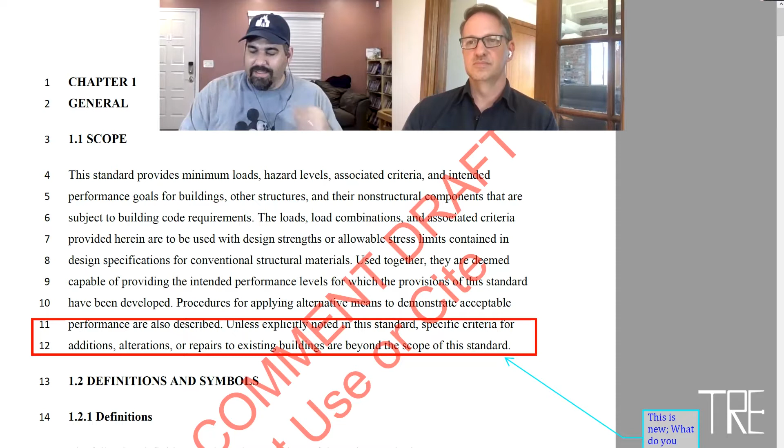And this has never been mentioned prior in the code. Most of the documents you'll look at have the alterations underlined and crossed out. The first few chapters I was looking at the document without the edits. So yes, this is a new set of language, and it took me by surprise. So that will be duly noted as a comment when I submit. Well, I would go further to ask, what brought this up? When you guys were having meetings, who raised their hand and objected, and everybody said yeah?

Yeah, and I think the intent, if I had to guess, and I could read the commentary, is that they don't want to make a blanket statement that this is good for existing buildings. But, hmm, I guess if you're referenced to the code from the adopted building code, then I guess it's okay.

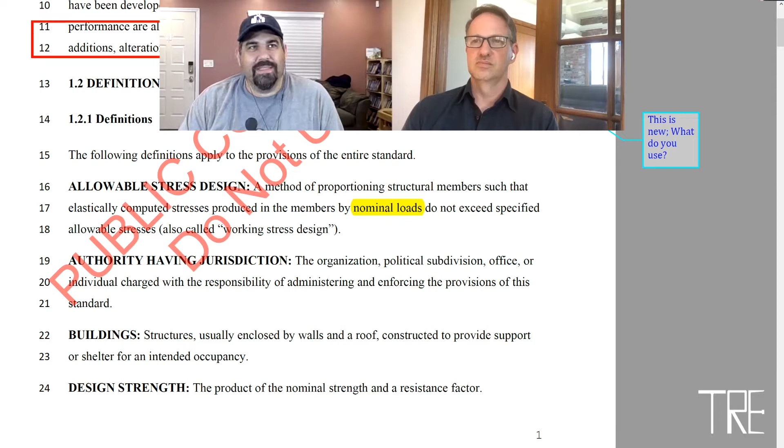So you can see highlighted in yellow the word nominal, right, and this still causes problems. Here it is for allowable stress design, and it's saying that you're supposed to use nominal loads, and you and I have talked about this at least twice on air. No, no, no. And here we have nominal sprinkled throughout the code, and under factored loads, that one should be correct. That is correct.

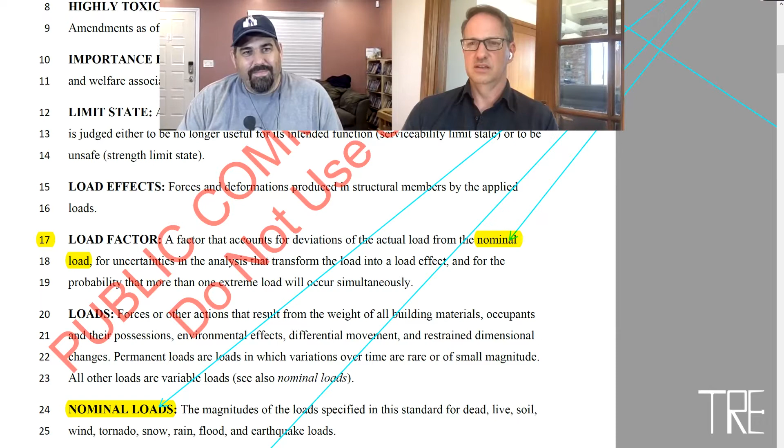And then we come down to load factors. Again, the correct use of nominal. Right. And here, nominal loads are the magnitudes of the loads specified in this standard, which is the correct usage. So those few lines there understand what it is, but then going up to line 17 there, they don't understand what it is. It's not consistent.

The principle of exceeding a nominal load doesn't make sense. It's like you don't exceed it until it's been factored. Right. And so consistency is all we ask for with that, and correcting the use of nominal. You'll see highlighted tornado loads. Like I said, it's a new chapter, and it's something we've got to consider.

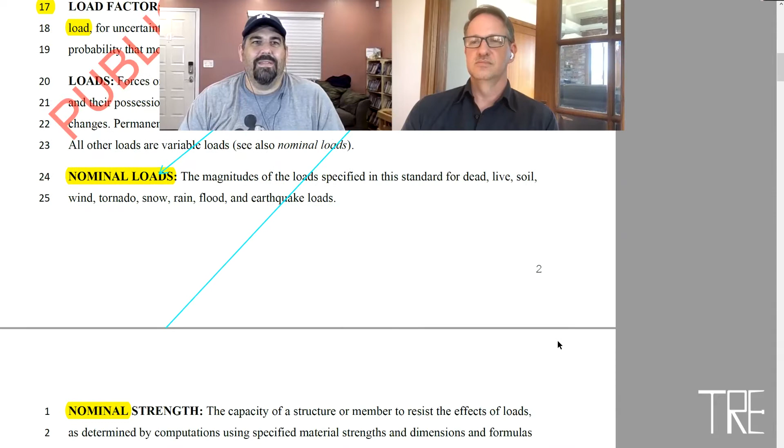Here's another nominal. They got the nominal strength is correct, right? It's the virgin strength of a material, and you factor it up or down. So we're seeing that it's just not consistent, but it is what it is for now, and I will again be commenting on it.

This one I saw in ASCE 7-16. Under the definition for service loads, it provides a statement of what you're supposed to do with service loads, that you have to identify each serviceability state and investigate it. And I'm pretty sure that the definitions is the wrong place to put a provision of action, because I would never find my responsibility to do that without reading the definition.

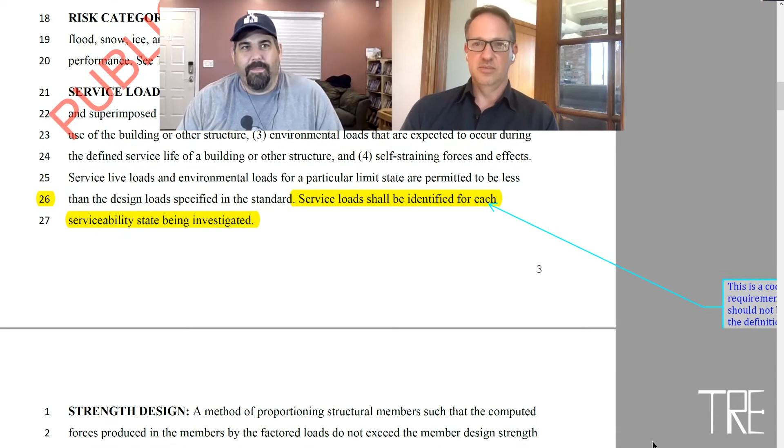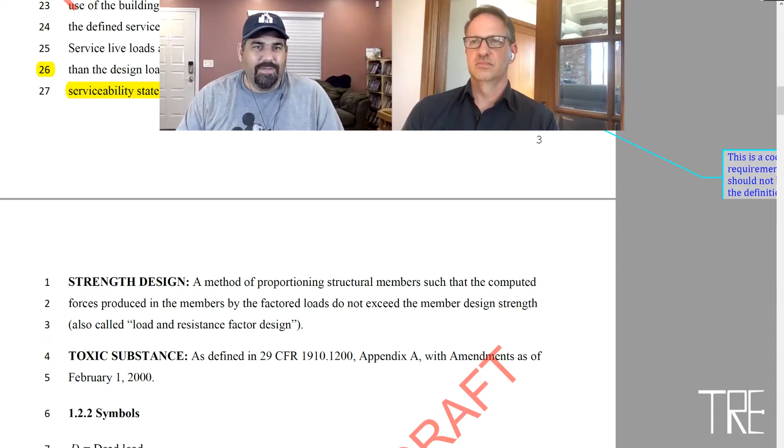Good point. That should be in the action areas and subsequent chapters, not chapter one, not hidden in a definition where you may or may not see it. I think in general we understand that we look for the worst possible combination of naturally occurring loads, but if it's something I have to do and it needs to be codified, then we need to have it in the action area.

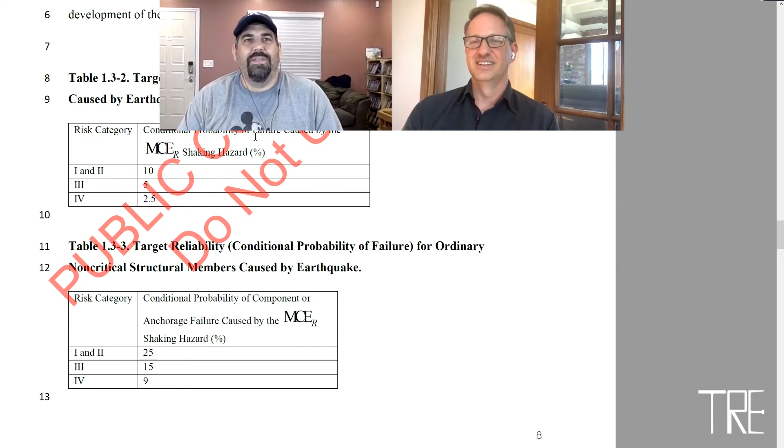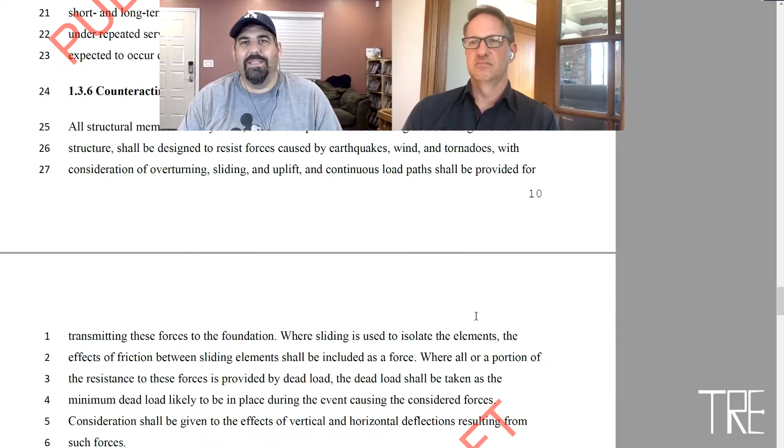Here's a fun inconsistency. We're talking about load paths, and it tells us we have to form a continuous lateral resisting system, with no mention that we have to have a continuous vertical load resisting system. Is that just because we all know that gravity exists all the time? That's the one we don't mess up? Sure. Am I being too pedantic about this?

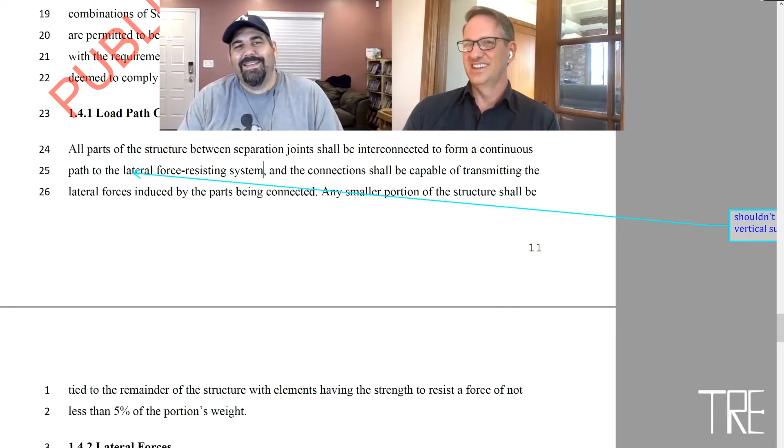No, because it's possible to create connections and conditions where something is connected until it's loaded, and then suddenly it's not connected. Something that's kind of levery, for example, something that might be cantilevered. It's intuitive to resolve vertical discontinuities, and it's harder to miss them than it is a lateral system.

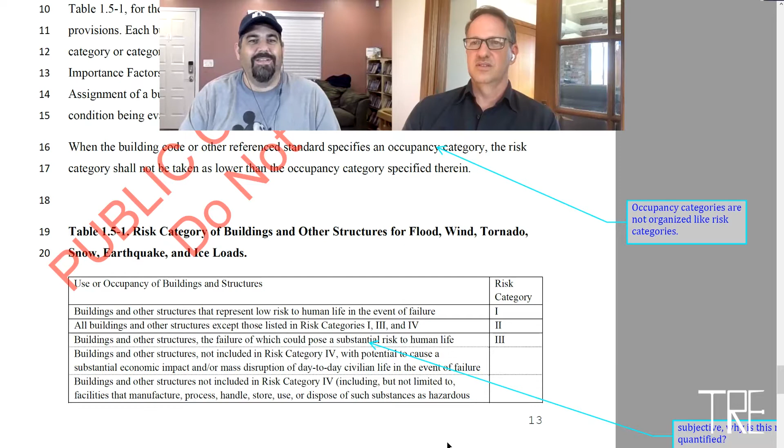But I feel like the legal document that lays out what you're supposed to do should not make a judgment about something that you're going to forget or not. Right. And it's so simple to say vertical and lateral. And the industry accepts that; that's even how the SE exam works. There's a vertical and a lateral. Yes.

And then we've had this. This is the biggest gripe I think we've ever had, and that's what is risk category 3 buildings? What's risk category 2? From an engineering standpoint, it gets conflated with the building code and how the architects define occupancy, which is based on fire and egress. They're saying when the building code or other reference standards specifies an occupancy category, the risk category shall be taken to be equal to, like, it can't be less than what's specified in the building code.

But our risk categories are not the same language as occupancy categories. So how is one occupancy greater than one risk? I don't know. And so, again, give me the Rosetta Stone that translates between architectural occupancy and structural risk category. That's what I want to know.

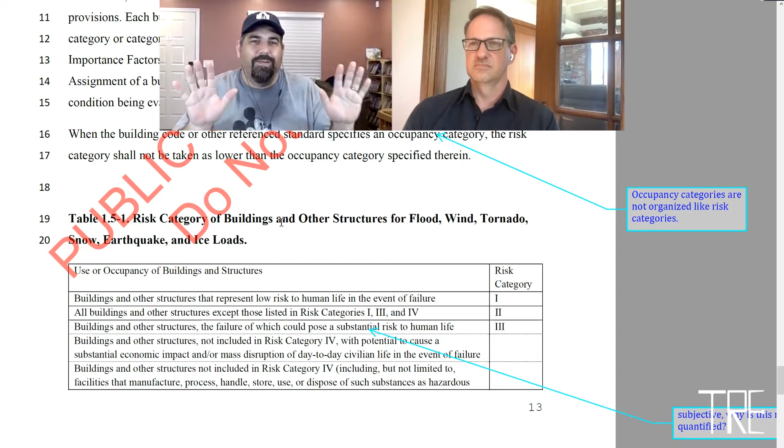And it's not defined. And then I love this generic subjective statement about a risk category 3 as something that represents a substantial risk to human life. Yeah, substantial. But it doesn't quantify what is substantial. And I think you and I have definitely discussed some formula of how many individuals, how many souls are at peril for a given element.

So if you're in a simple small building where there's a shear wall on each side, all of the occupants in that building rely on each of those 4 shear walls. But if you're in a warehouse that's 500,000 square feet that has multiple braced frame systems, expansion joints between bays, well, that one braced frame doesn't present peril to the entire structure, just to that one bay.

And also a warehouse with 100 people in it, even though it's 500,000 square feet, is much less risk than a single building with the equivalent amount of people in it that has no redundancy because it only has one lateral system in each direction. No, and we noticed this with the last code change, is that suddenly the failure of any element constitutes a risk to everybody in the structure.

Right. And you should be able to look at girders and joists and beams and do the same analysis of how many people are at peril if that one element goes. Rather than an entire building being a risk category, this gets it more into a resilience and reliability matrix of the structure. You're looking at each element and assigning its risk based on its potential to do harm.

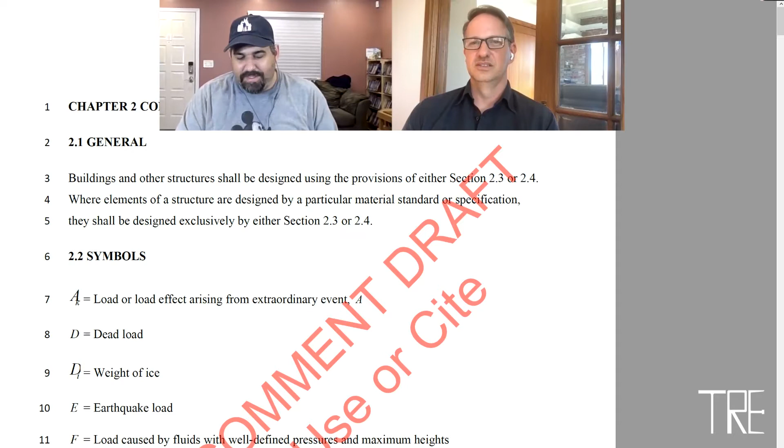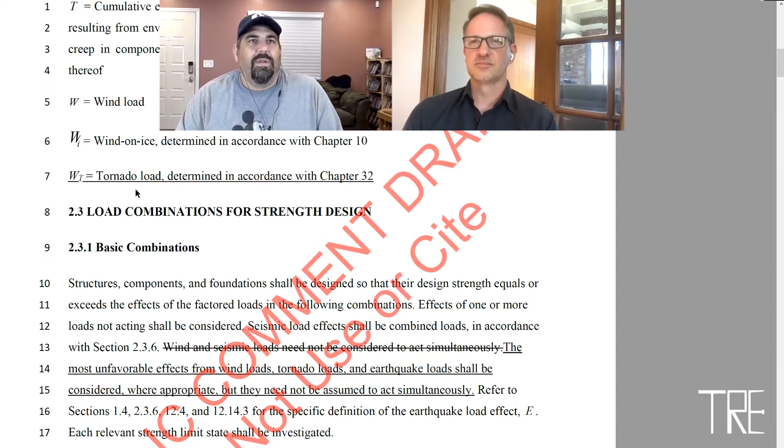Yeah. So chapter 2, we're getting into our load combinations. And there were some interesting things in here that put me off a little bit. So you can see we've added some new terms for basic load cases. And one of those is a wind tornado. Again, complementary to chapter 32.

So I moved from the West Coast to the East Coast before ASCE 7-16 was really adopted. And I know there were some changes in the seismic code, but I haven't really been affected by them. And so this is even more clarification, or more in that same vein. And so they broke out the seismic load combinations in the last version of ASCE 7, which I feel like you should break out wind if you're going to break out seismic, but I can live with that.

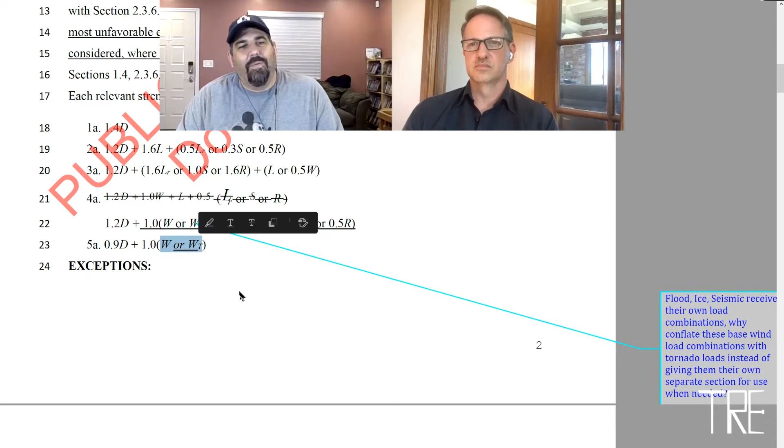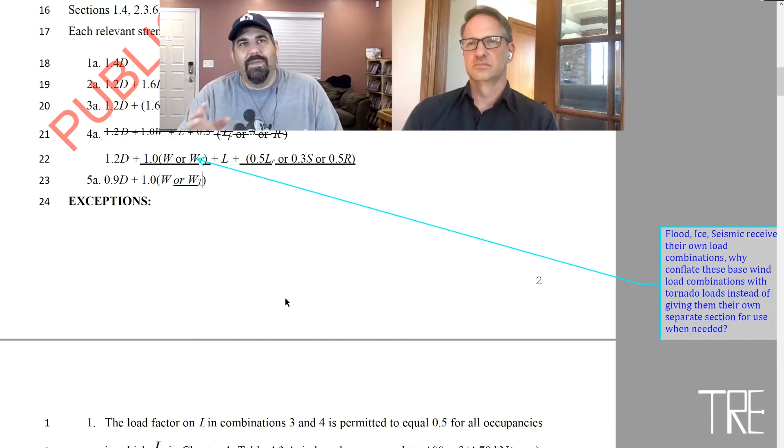What they've done now is they've given you, any place there's a wind, or a wind tornado. Right. And I feel that's inconsistent because it doesn't impact all structures. It's an alternate set of load combinations. They broke out seismic and flood loads. Why not break out the tornado loads as well and just make them their own discrete set of load combinations, rather than

Now, 100% of the buildings you look at, you're going to have this in your spreadsheet, or you're going to have to know that it exists as an OR, right? Because every time there's an OR, you're doubling the load iterations in your load combinations to catch everything. Thoughts on keeping that integrated?

It's hard to say, because we've talked about areas where wind tornado will govern, and areas where wind tornado is zero. And then there's the transitionary zones where there may be elements of the roof, for example, or walls that are controlled by one, and other elements that are controlled by the other, if they're different enough. And I don't know enough about the provisions yet to know if there's going to be crossover like that. Have you noticed anything like that?

Can you imagine a scenario? So I haven't run any numbers yet to see if I can break the code, right? Like find a gotcha where you've got to be really careful. Right now, you really have to run them in parallel when tornadoes apply. To me, you keep these basic load combinations clean, simple. The cases you always have to consider. If seismic's only used 15% of the time, then feel free to break it out. If ice is only used, break it out, because then when I know it applies, I'll add it, which seems to be the way they're going.

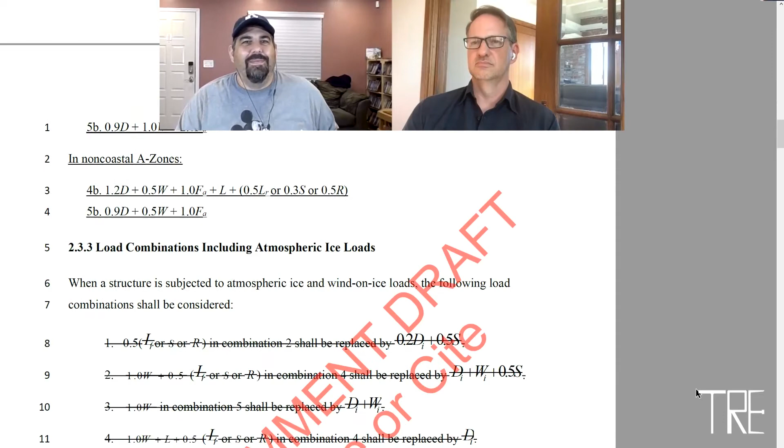And then I started reading the commentary. This S is not supposed to be there. It's a typo. It's supposed to be this load combination minus snow, because tornadoes don't generally occur when it's cold out. Yeah. So I was really scratching my head until I read the commentary and put together the pieces that it's a misprint. I guess you could take an audible and punish yourself with a little bit of extra load.

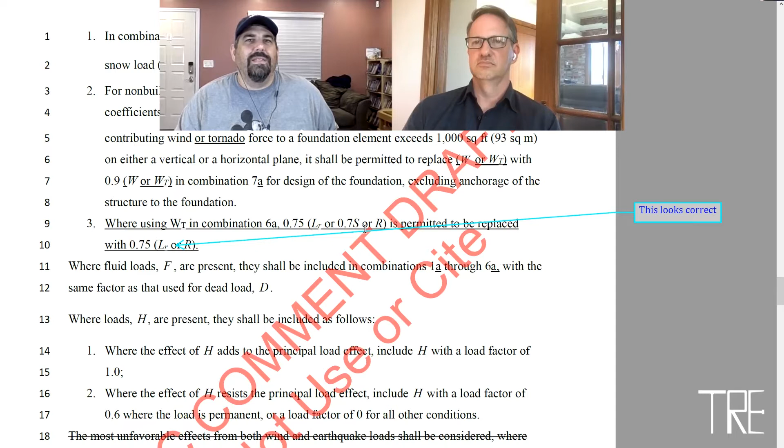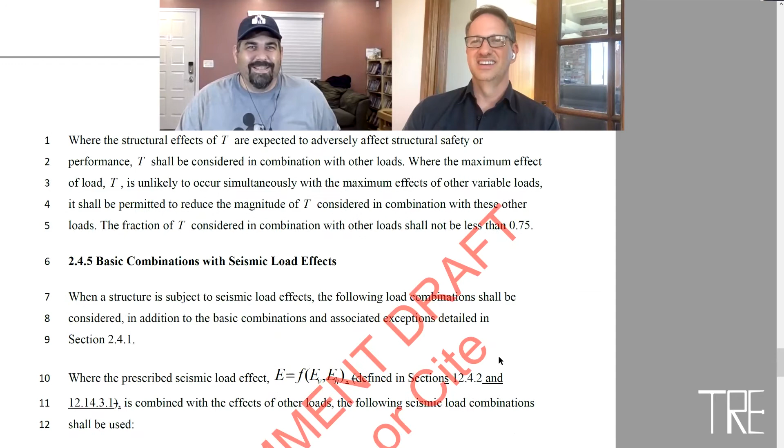I'm trying to think of anything else in chapter 2. And it does seem like this is getting much, much longer. See, in ASD, they dropped the S. There it is. They got it right there. So I was like, great, another penalty for LRFD. Yeah. If that doesn't get corrected. That raises the question too, that model codes tend to include alternative ASD load cases. Which don't usually benefit you, because you're supposed to jack the load up before you use them.

So I like a precise code, but if 9 times it's one way and then a 10th time it can be something reduced or give you a little extra benefit, I'd rather just have all 10 be the same than have to worry about that one time you can get a little bit of extra strength or something. And this seems like one of those, what are we accomplishing here?

Right here it says it shall be permitted to replace 0.6 dead with 0.9 dead in load combo 10 for the design of specially reinforced masonry shear walls. Why do they get a 30% extra increase in dead load? That's weird. For their overturning analysis in instability cases. Well, but in LRFD, when you do masonry shear walls and you're in specially reinforced shear walls, you also have a dead component that contributes to shear resistance. But yes, it's ultimately going to lower your hold down force when you tie your rebar into your footing.

Right. But of all the other lateral systems out there that are going to rely on 0.6 dead, why does this one lateral system get a 0.9? And then I also point out, when you get to specially reinforced masonry shear walls, you get a much better R value. I put lower R. It has a higher R value. Sorry, inverse. Right. I know what you mean. Yeah, and so it's already got a lower CS. Right. So I'm not arguing that it shouldn't have a better R value than an ordinary masonry shear wall, but why does it get its dead load increase? Double benefit. Yeah, and again, for just one element. Keep the code clean. That just seems superfluous at this point.

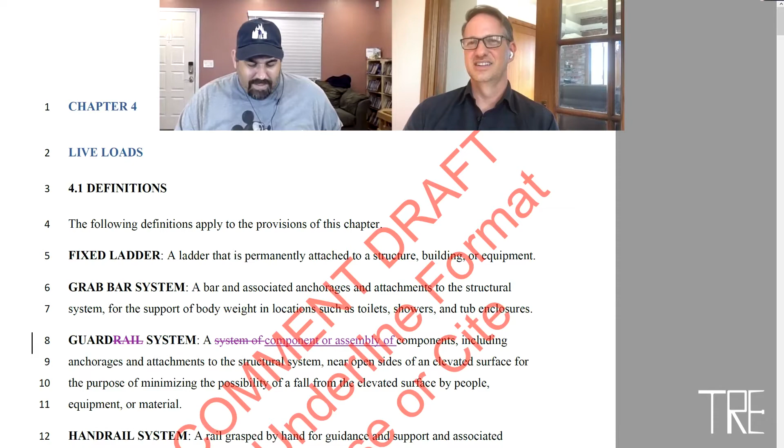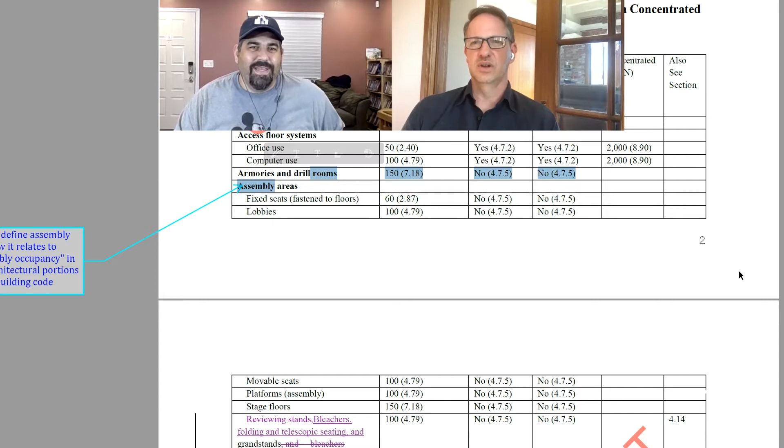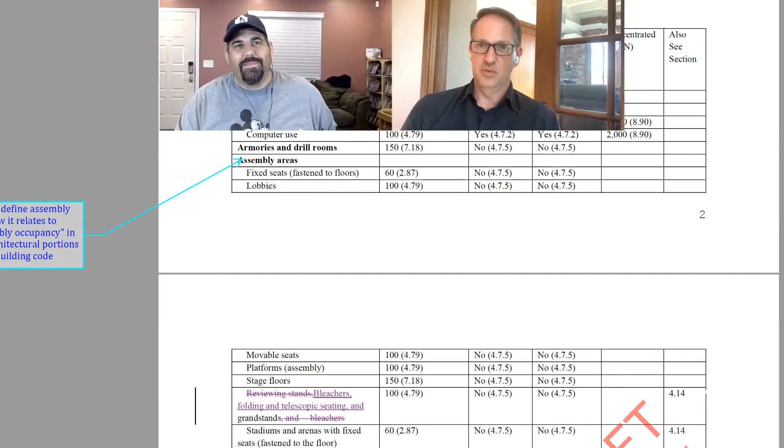Chapter 4, live loads. I still wish that this section was like 100 pages long with every live load conceivable. Here we see assembly areas with no definition provided anywhere in the code. So you have to rely on architectural occupancy being assembly. Really, ASCE, would it be hard to define that for engineers? It's purely a matter of coincidence that it even exists anywhere else in the code, because it's not how it was put in here. It's like, just give me a definition. That's all I ask. Right.

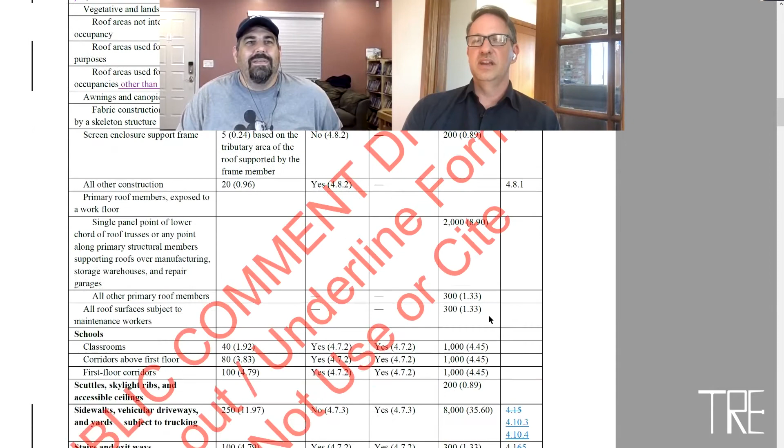How many other areas in ASCE 7 require you to go back to, what is it, chapter 1 or 3 or something like that of the model code? Yeah. It's inconsistent.

Partial loading, so skip loading, right? On beams and things. Okay, it says the full uniform live load needs to be applied only to the portion of the structure that produces the unfavorable load effect. But what about point loads? Shouldn't it be all loads that create an unbalanced effect? Yeah. Oh boy, I get to neglect the point load on the end of that cantilever. That's great. Yeah, that's how I read that. Yeah.

Fall arrest systems. Yes. So here's an interesting one: what governs? Who governs? What portion of that system is the responsibility of whom? So we have OSHA, that obviously governs all of the hardware, all of the requirements from the anchor point to the person. Right. That anchor's got to attach to a structure. And yes, luckily, the ASCE is really conservative, right? Because it's saying a 3,100 pound live load. But when you multiply that by 1.6, you're at roughly 5,000 pounds. Not surprising. That's what they were targeting. That's the worst case OSHA has for a single person.

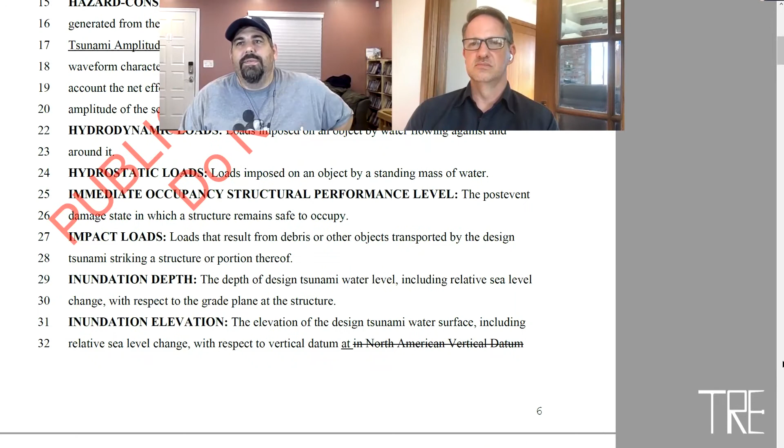Tsunami load effects. What could I possibly have to gripe about here? Have you ever read the tsunami loads? Only briefly, and really I'd like to read more in the commentary section just to see how this was arrived at. There is some interesting stuff in here, and I think some of the equations look very daunting, but I think it's like seismic once you get into it one by one.

Right. Oh, this is me being a... what's an earthquake shelter? A building. I mean, I understand a hurricane shelter, and really that's even the wrong language too. The code language is storm shelter, regardless of whether it's a tornado or a hurricane. Mm-hmm. I think the Florida Building Code has hurricane shelters specific to the state. But I don't know how you build an earthquake shelter unless it's something you carry around with you.

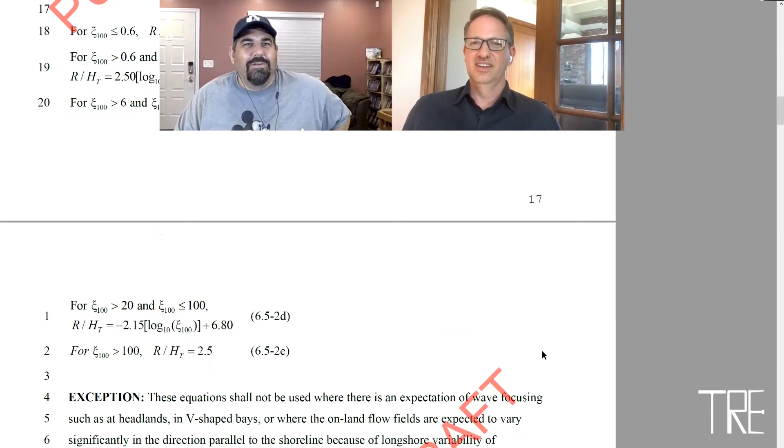I would put a base isolated safe room in my basement. So that you can run to after the earthquake's already hit you? Well, we have those early warning systems now that have yet to be used, but it supposedly will give me 60 seconds or so.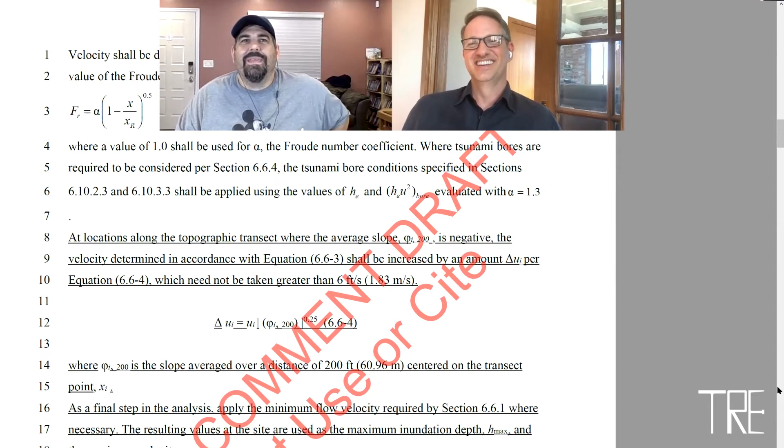I guess it makes sense if your bed was an earthquake shelter, like your bedroom, because then when you're asleep you're okay. One of those big frames.

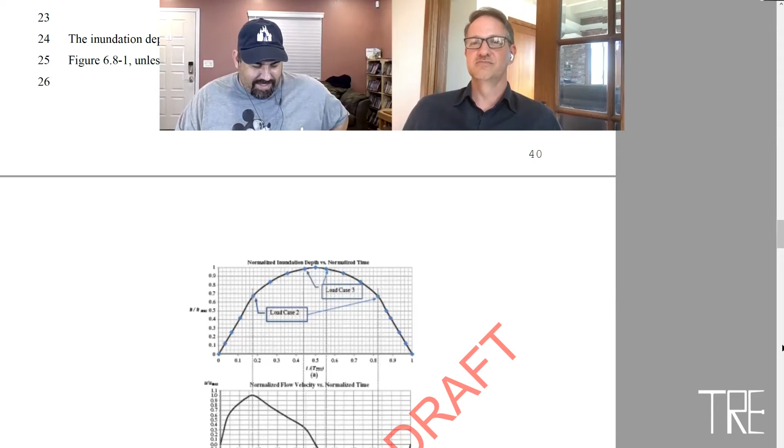But I guess beyond that, explain to me what design criteria that falls under. What code do you follow for an earthquake safe structure? Ooh, earthquake structure. Okay, yeah.

There's a requirement for open air and unheated structures that you have to meet the minimum energy code for this factor to apply. Whose responsibility is that? So I'm hired to design the building. Do I have to run the analysis, or do I need to sub it out to a mechanical engineer to make sure that my building meets the energy code?

It's always freaked me out to think that structural integrity is supported by functioning mechanical equipment, and that if, say, this would never happen, but what if Texas lost all of its power in the winter and they were unable to keep things running for an entire state? I know it's ridiculous to say, but what if it happened, and suddenly those buildings are under strength because they're no longer supported by that mechanical equipment.

Yeah, the snow load is greater than anticipated because it's not melting, since the building's not producing heat. They really need to strike that from the code, because we can't have an entire state where roofs start collapsing because the power goes out.

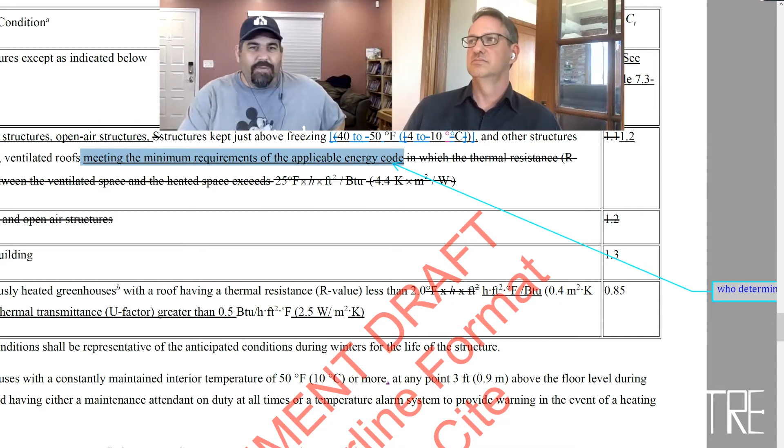Rain-X on all the roofs so it just slides right off. There you go, or that stuff they put on the snow disc in Christmas Vacation. Remember the non-nutritive cereal varnish? Yes. You don't know what I'm talking about, do you? No idea, I'm just humoring you.

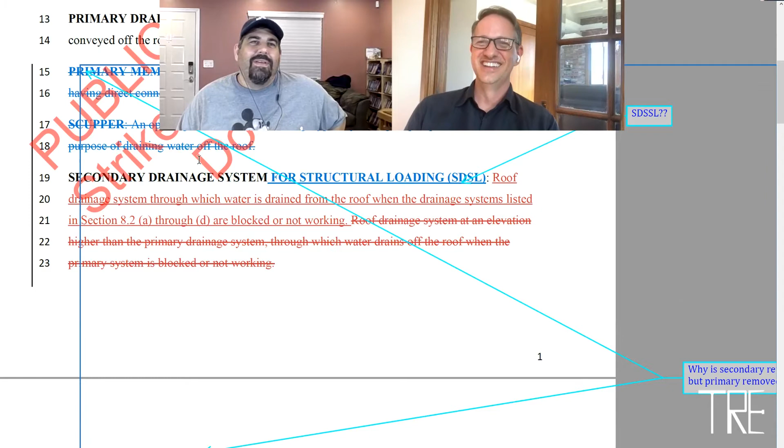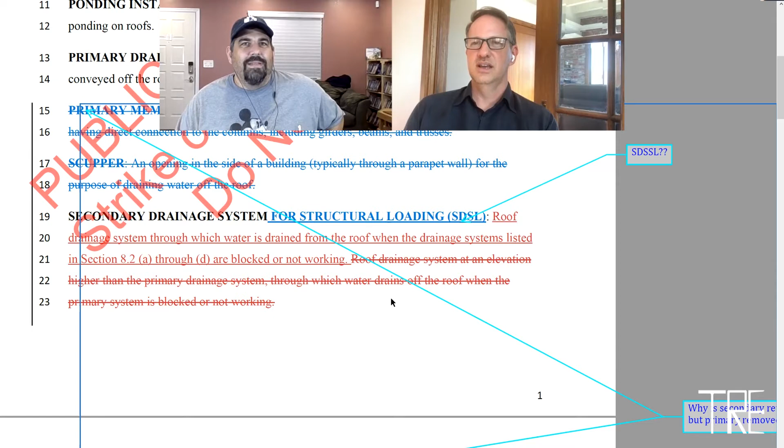Okay, so, secondary drainage system for structural loading, and they coin a new acronym, SDSL. But when I look at the letters in this, they're missing an S. Right? It's SDSSL. I'm not the only one seeing that, right?

And so, again, me being a jerk, so they retained secondary but got rid of primary, which was kind of funny. Primary is no longer used in the body of the document, so I guess they dropped the definition. But I want to talk about the difference between secondary and primary, because they give a pretty simple definition, and it doesn't exist anywhere else in the code, even though it only applies to section 8.3.

I feel like it's a definition we should have. What's the true difference between a primary structural member, a secondary, and even a tertiary member? It says that for determining susceptible bays, structural members not having a direct attachment to the columns.

What about a transfer girder that's attached at both ends to other girders? Those girders are attached to columns.

I don't feel like we should judge the significance of an element by what it's attached to. No, it's about how many things are in between you and, I don't know, it's how far downstream you are, I guess. What is that the fuse for? Am I losing a bar joist, and so I lose 8 foot of roof for the length of that bar joist? Or is it the girder that holds up 40 foot on either side for a long span?

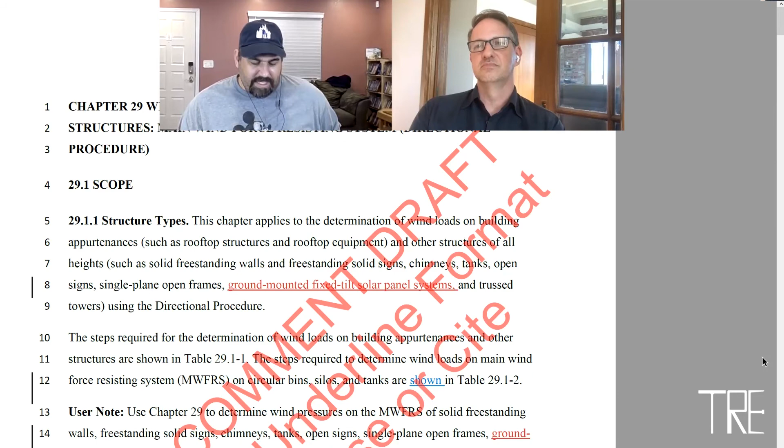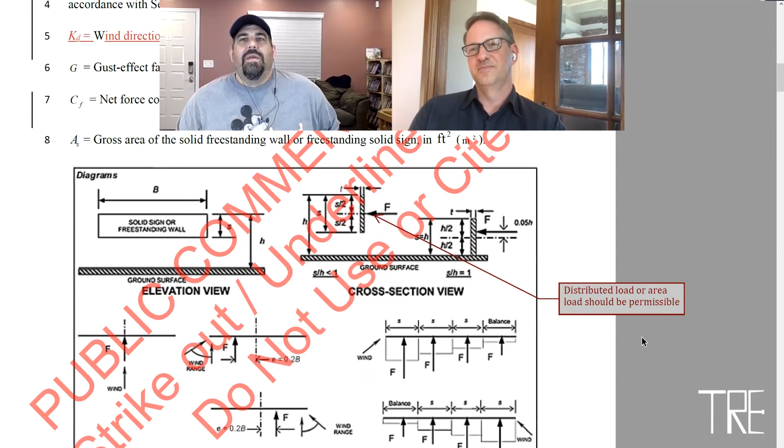I actually don't think I had anything in chapter 26. Chapter 29 - good old additional wind loads on things like buildings and such, or attached to buildings. But not existing buildings, has to be new construction.

So this came up to me actually this week - this one pisses me off. That's all the same, nothing different, it's there the same, right? It's identical to what was before, no change here. But we've dealt with this before with freestanding signs and walls.

How often do people do this 0.05 height on an object that's attached to the ground? Most people apply these as just pressures, as Q, not as F. And so it's almost like they think we're too stupid to design with the pressure and account for the off-center nature or fluctuation that we have down here, where we're supposed to offset the centroid. I feel like they thought they were being generous somehow.

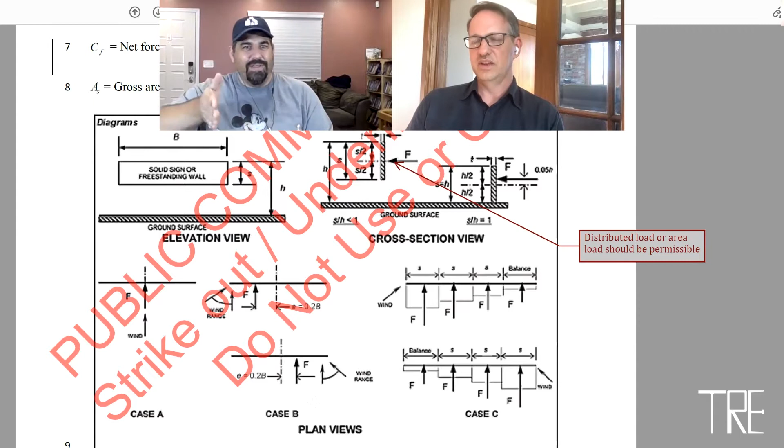Well, so if you have a monopole sign, like a roadside billboard, this makes sense, it's perfect. And those people probably do need a little bit of extra guidance and hand-holding to make sure the load gets applied - or a cantilevered wall. But when you start getting into multiple poles, then you start getting into problems.

So I designed this week a truss 70 feet long that's supporting an LED screen outside, and it is end supported. It had 60,000 pounds of wind shear on it. I am not applying that as a point load in the center of my sign.

But per this diagram, that's exactly what I'm supposed to do. And how does that even work? How do you design all those secondary and tertiary members with something like that? Yeah, and that's clearly like 4 times the bending moment.

This type of vector analysis would work well for the foundations, but it doesn't really work for the members taking the load directly.

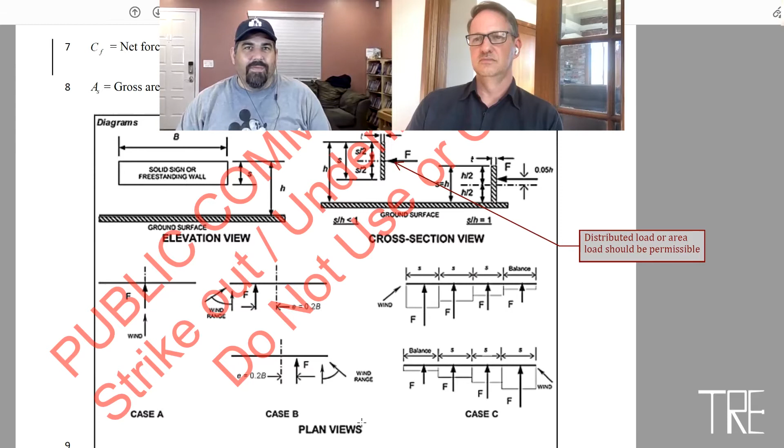So I think they should allow you to be permitted to apply it as a pressure, as long as your centroids match the centroids of these diagrams down here, this 0.05H or the 0.2B. But it is just create a diagram right beside this, the pressure alternative.

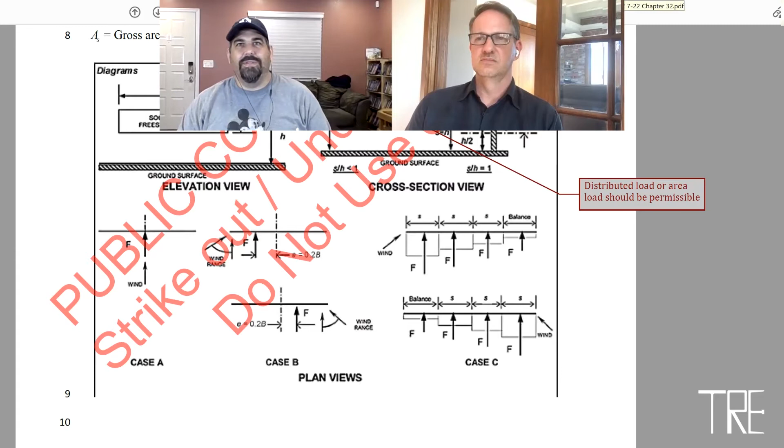That, worst case, not, I guess we don't want to say that. We don't want to say the worst case. The more rational case shall apply. And this is clearly simplified. That's not how the wind's applied, so it's an approximation. Applying it as a discrete pressure is more accurate, in my mind. Yeah, it's silly. It's like they're trying to do the work for us by resolving it into vectors. Like, thanks, I'm good. Just give me the pressure, please.

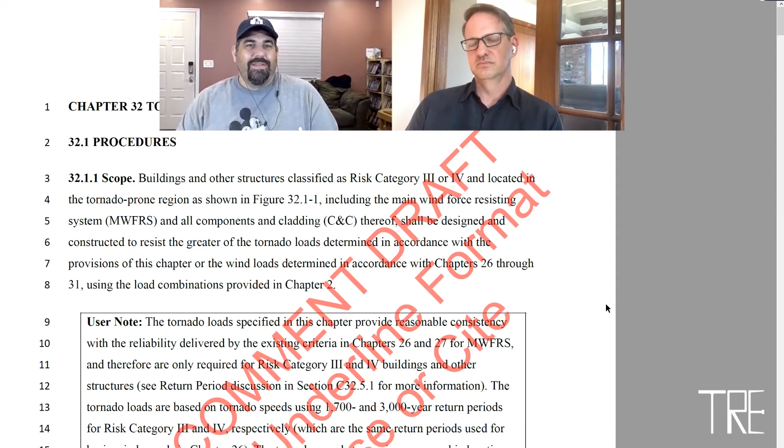All right, so new section, chapter 32, tornado loads. Yes, I have designed at least 3 storm shelters per ICC 500 that are tornado-rated shelters. Which has nothing to do with this, first of all. We'll just start by saying that.

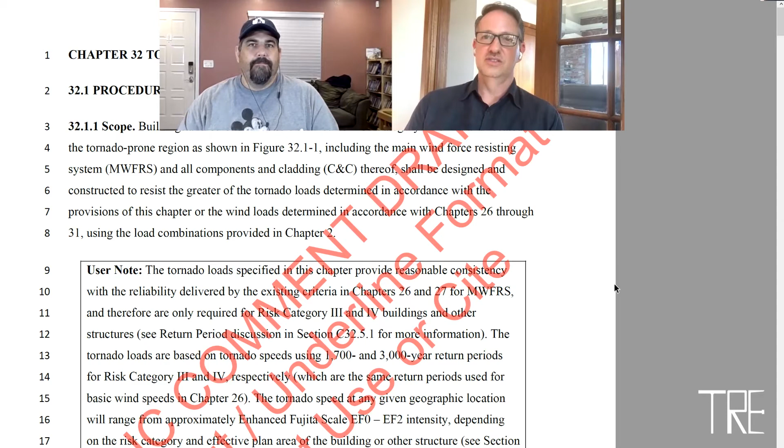Honestly, I think this chapter was misnamed. I think really this is a localized severe weather event, so you could be dealing with thunderstorms, downdrafts, things like that, as opposed to regional severe weather events, like tropical storms and hurricanes, which have a different quality of behavior. And that's why they don't apply at the same time, because you don't have maximum hurricane winds at the same time that you have a tornado.

I know there are hurricane spawned tornadoes. They're at the fringes. They're not something that's occurring in the same place. It would get wiped out by the hurricane.

And I guess disclaimer, this is not a training session on chapter 32. It's not been approved, it's not been issued, and we haven't used it for design.

So you kind of get excited, like, oh, we're going to have to consider tornado design for risk category 3 and 4 buildings, because that's what it says in the previous chapters. And so you're kind of getting set to think this is going to cost every municipality tons of money when they design a fire station, or when an owner decides a really large restaurant falls under assembly occupancy and risk category 3. But so this is mapped to the continental divide, basically.

Yes, so there's a lot of outs for this design process that's written in this current incarnation of the code. So there's your map. West Coast, you're off the hook. East Coast, it looks bad.

But they give you this flow chart. Happy day, wind design loves the flow chart. And basically, the first question is your risk category 3 or 4. That seems reasonable. If you're not, goodbye. If yes, you go to that map. And if you're in the eastern 3/4 of the United States, all right, you continue shouldering on.

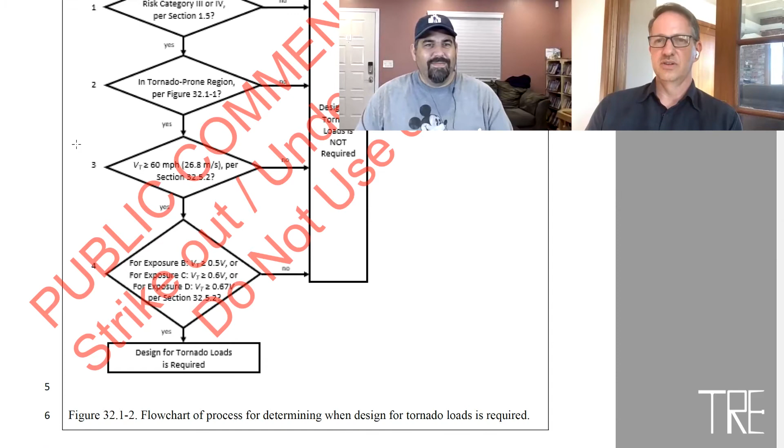This is where it got really weird. I'm like, this has got to be a misprint. If your wind speed for tornadic events is greater than or equal to 60 miles an hour, you got to do it. And I'm like, a 60 mile an hour tornado, that's not anything. It's not even a tornado. What are we doing here?

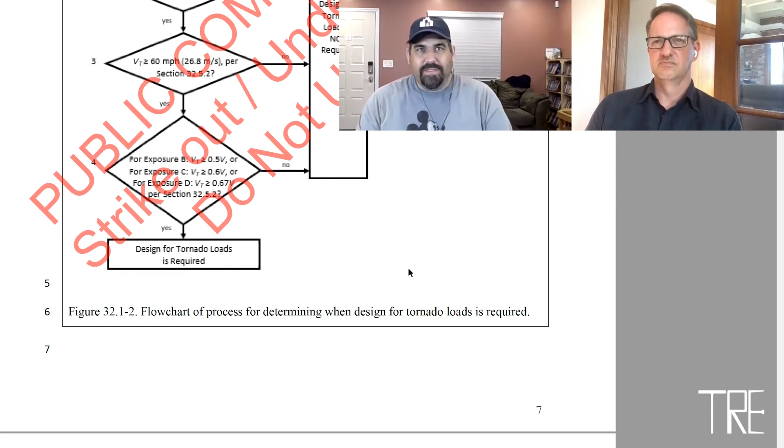And then it gives you another set of outs based on your exposure category and some of the other parameters inside the document. And if you answer yes to all these things, congratulations, municipality, you're paying for some additional tornado loads, potentially.

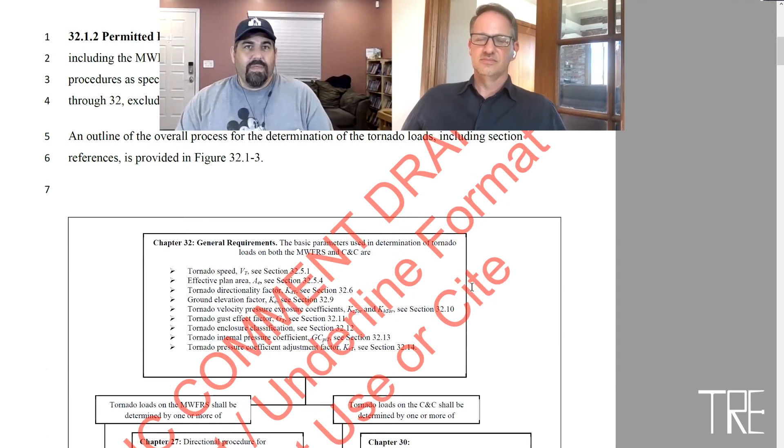You then follow the same procedures as the rest of the wind code. So you have your wind speed determined per chapter 20, 23 or 26, whatever it is, and then you have a tornado wind speed. You're going to be using the same equations in parallel with the two different wind speeds. And the reason you have to use them in parallel is you can't just say the tornado wind speed is less than the design wind speed.

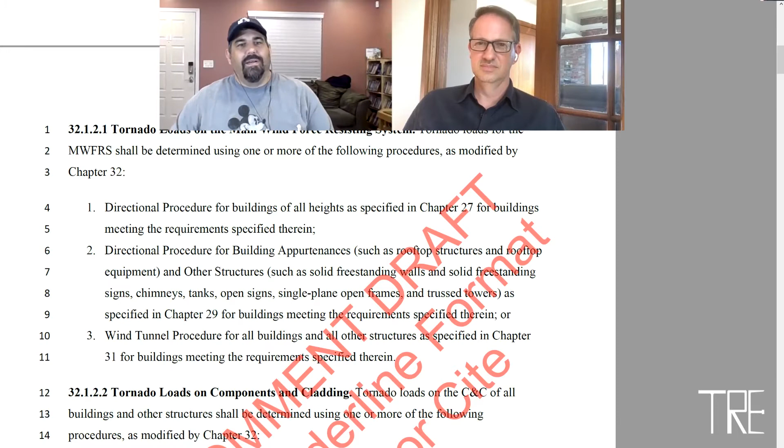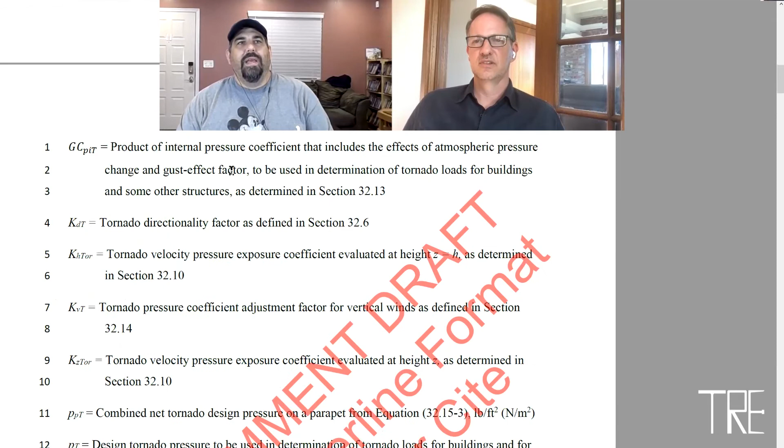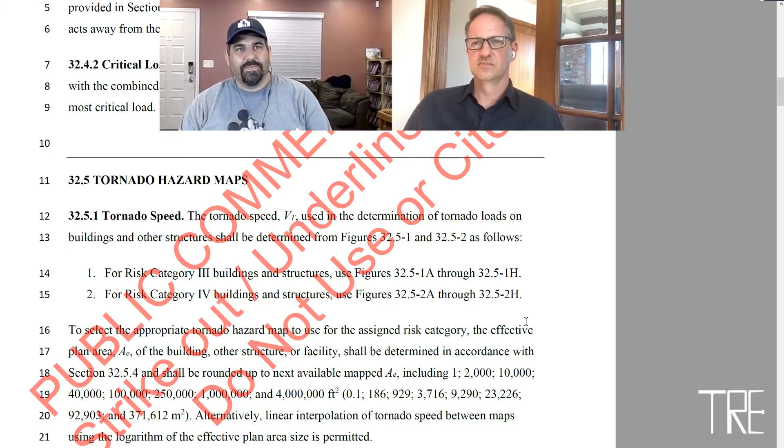Tornadoes have their own set of factors, like KZT. And all of those things are discrete to tornado loads. They don't use the same tables as your main wind force and component and cladding do. And as you can see, they're all defined here. They all are KVT, KDT, right? They're all specific to tornadoes. All right. So, huzzah. But then we get to the maps, and there are a lot of maps.

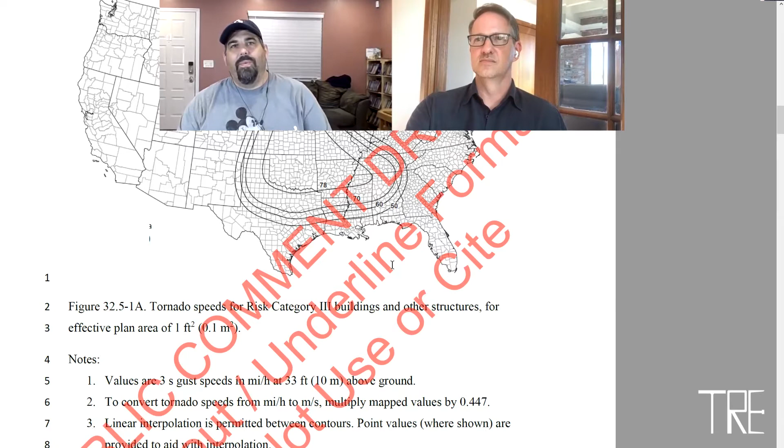So, this is what? Risk category 3 buildings. This is the first map, and you can see it's a pretty small region, Tornado Alley, right? That gets considered for tornado loads. And there are several maps for each risk category, and this is for areas larger than 1 square foot structures. And the reason they did 1 square foot was for like communication towers and things that have a really small footprint, and you can interpolate between all these different maps.

What they're looking for is a facility size, and it's not the floor area, but they give you a method for circumnavigating a building with a polygon. So if it's a cross building, you're going to connect each corner by 45 degrees and take the area in there. And in the commentary, it's saying that way, if you have a U-shaped building, it's the same as a square building as far as probability of getting hit by a tornado. So we use the same representative square footage for that. And if you have a compound that has several buildings, you're drawing a polygon around all those buildings because that compound has a higher probability of getting hit.

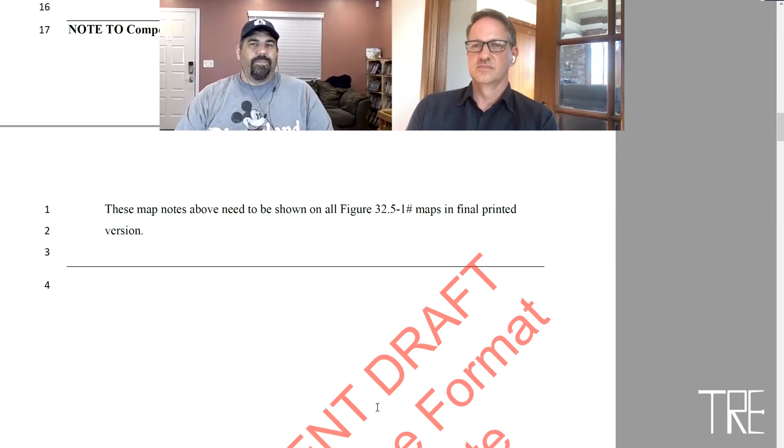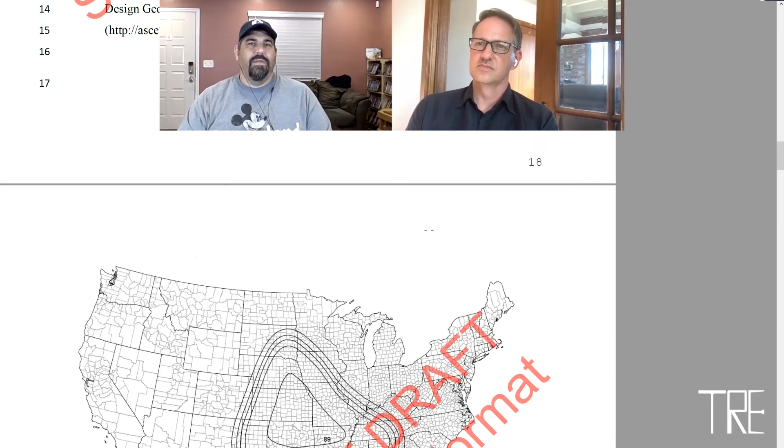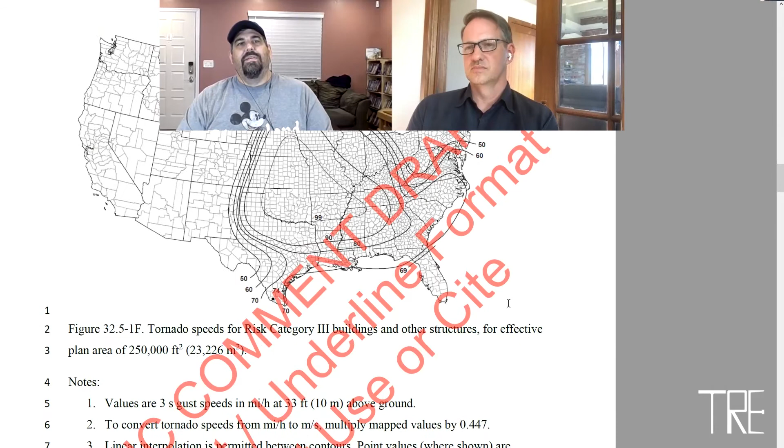So that doesn't seem bad. You're like, man, most of the country is off the hook again. They take it from 1 square foot to 2,000, from 2,000 to 10,000, and we can see the contours are getting bigger and bigger. 40,000 square feet, so we're almost to the Gulf Coast. And then we go to 100,000 square foot facility, 250,000 square feet, and we finally start to get the Gulf Coast where you now have to consider, you have to run the numbers.

We all know that those are still 100 miles an hour slower than the hurricane loads that you're designing for. Right. And it keeps growing, 1 million square feet, and then the worst case they give you is 4 million square foot footprint. So as you and I talked, Tim, right, the bullseye is probably any structure of size is going to probably get governed by the tornado load. But there's this transition region, specifically between the coast and that bullseye, where you flip a coin, it could go one way or another, depending on whether you're risk category 4 or a larger facility. But once you get to hurricane prone region, I just can't ever see this governing.

And then for risk category 4, there's a whole new set of maps as well that go through all those different square footages. Yeah, I guess if you went through and did some analysis, you may be able to find a cutoff line on the map that is not indicated, but actually exists if you follow the provisions. And what frustrates me about this is that it's adding a lot of work. The calculations aren't difficult, but you're having to do your wind load analysis twice to get to a Q pressure that's equivalent, so that you're comparing apples to apples and not apples to oranges, with all those different variables for the exposure factor and height factor and those things.

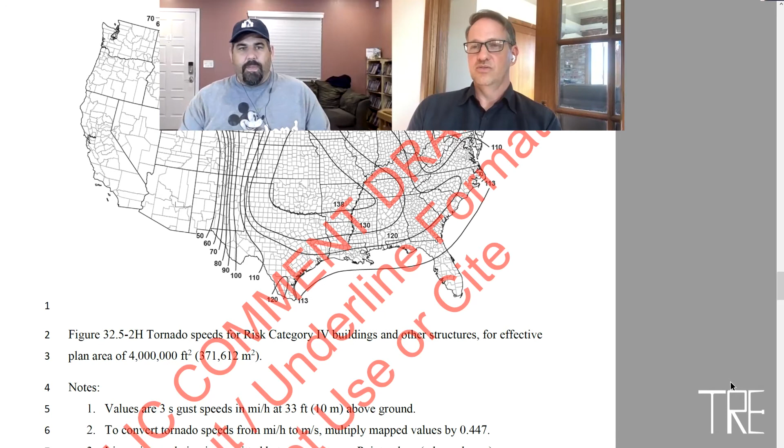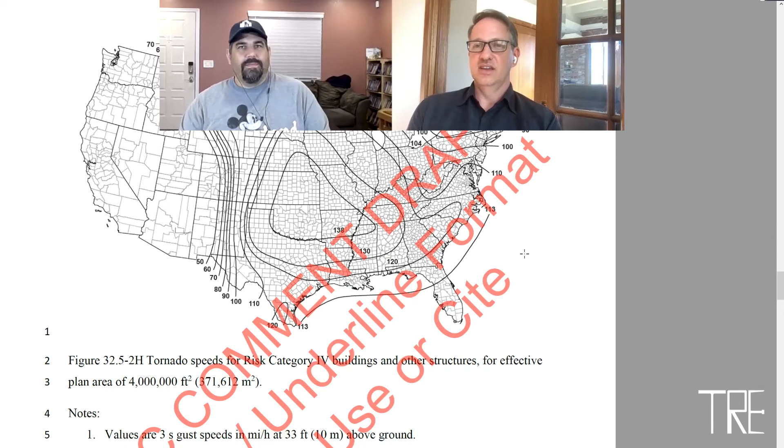Right. Okay. The backwards ripple effect of this too would be the construction documents provision of the chapter 16 sections of IBC, FBC. Are you going to have to fill this out too on your drawings? So now they're going to have to say, what are your parameters? Because they ask for that for seismic and wind. And in hurricane prone regions, we have to have impact rated windows generally, right? Impact rated opening protection. There's an option in the code that it can be panels you install or shutters that close. Yeah. This says you pretty much can't have powered or human intervention required, because it's such a quick event. They have to be in place.

So outside of the Gulf Coast and the Eastern Seaboard, that may increase cost to get just your windows and doors upgraded to meet the requirement. And I didn't look at the ASTM they referenced to see if it matched the same criteria or not. But as we know, missile impact for tornadoes is much worse than missile impact for a hurricane.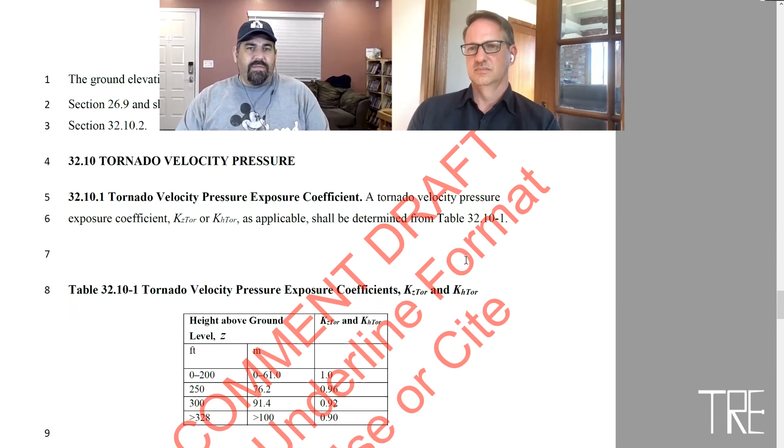And that being said, the maximum considered tornado event is an EF2, which is a sizable wind, but it's not... I mean, we saw on those wind maps, right, that they're not that elevated. Look, 139 miles an hour. I have that in Florida. Sure, inland Florida. Yeah. And like that 120 contour that I'm looking at up there in the Panhandle is higher. It's like that's about 20 miles an hour lower than the hurricane number. Yep.

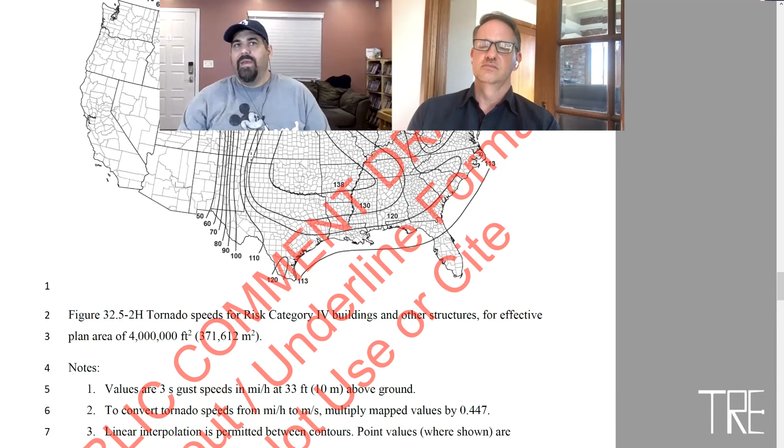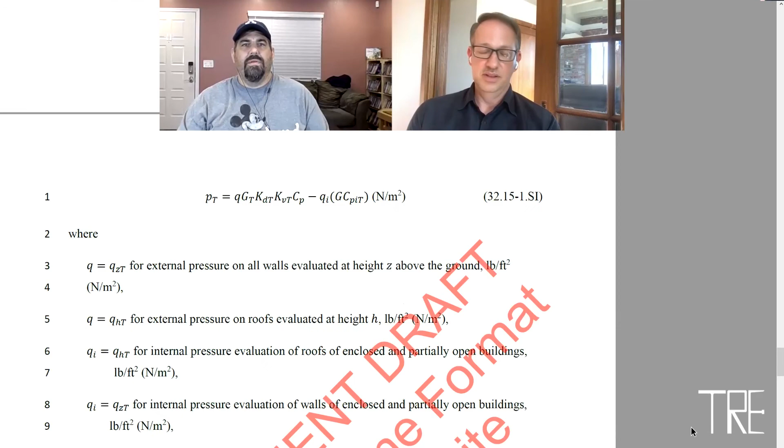And so I've been straining to figure out what we're really accomplishing in the grand scheme of things, other than potentially causing a few more hours worth of work on every project. Yeah. And only a slim percentage that are actually going to be governed by these new provisions. And it also brings building enclosure classification into question, because isn't just about any building really going to be partially enclosed under these provisions?

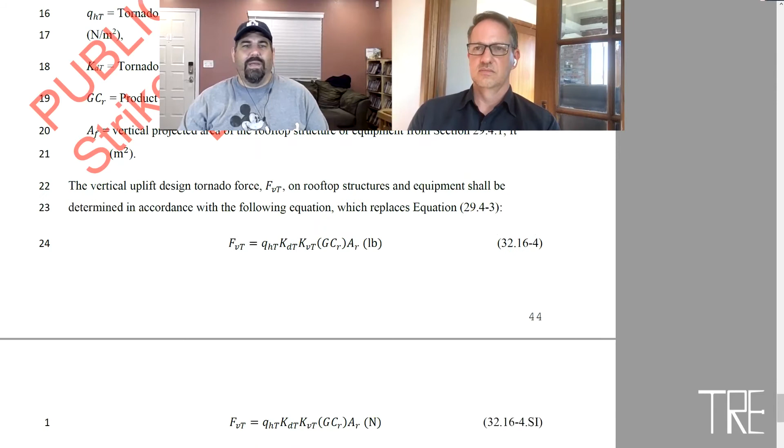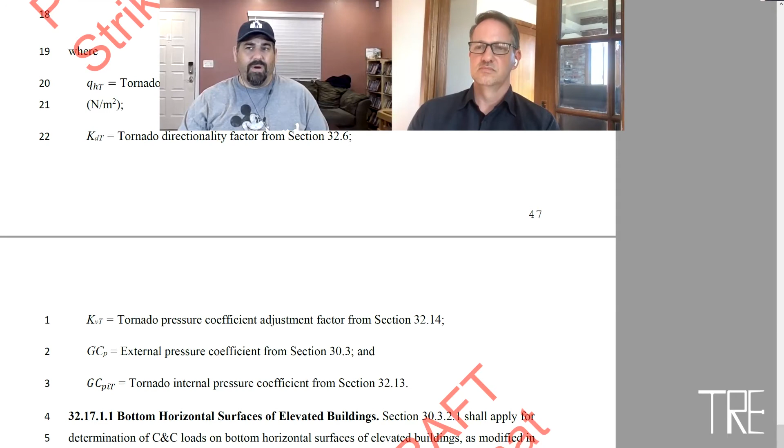Right. You start to worry about things breaking out, and there is some discussion in here about equalizing wind pressure and those things. But that 130 miles an hour, 139 miles an hour pales in comparison to ICC 500, where pretty much you're designing for 250 miles an hour or 200 miles an hour, depending on where you are in the country. And yes, there are some like 160 and 130, but in Tornado Alley it's 250, and then there's a huge ring around there of 200 miles an hour, and so this is nowhere near shelter.

So hopefully people... I don't want people confused and thinking, oh, look, all of our risk category 3 and 4 buildings are shelters. It's very clear in here in several places that ICC 500 is a different category, and that if you design for these provisions, unless you follow ICC 500, you're not a shelter. Those two things are still completely separate.

And so can I speak real quick to the very first line there, where they try to provide some commentary: historically, tornadoes kill more people per year in the United States than hurricanes and earthquakes combined. Mobile homes, people in cars, all of these things that are not related to structures as they are with hurricanes and earthquakes, do we know what the number is of people who are killed as a result of building code related structural failures?

Right. Yeah. Because being in your car doesn't count if you're deciding to institute chapter 32 based upon just deaths. You just counted them all. Like, great, so everybody out there in their Volkswagen just added to the adjustment of the code. That doesn't make any sense. So I don't like that first line. Yeah, you know, and this logic seems flawed.

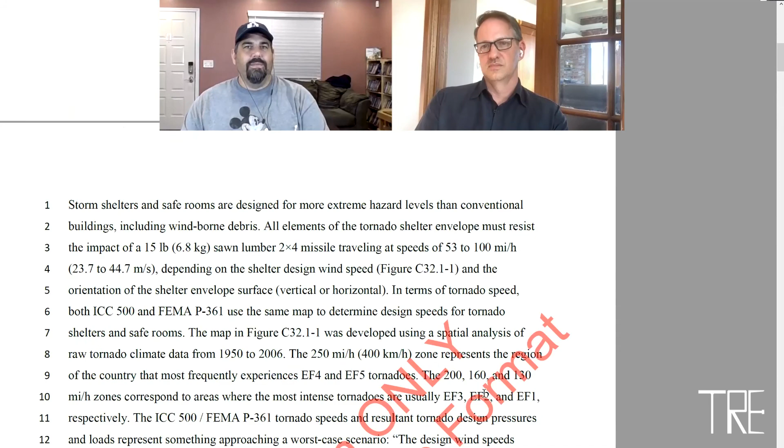In the second paragraph, it talks about how tornado loads are unique, like flood and tsunami loads. Again, it begs the question: in Chapter 2, why are they not their own section? Why are they in the standard load combinations? It's very frustrating that while they recognize the difference, the code's not reflecting that this is something very special. Here's the proviso that the FEMA and ICC 500 documents are for storm shelters and safe rooms. Don't use this document for that.

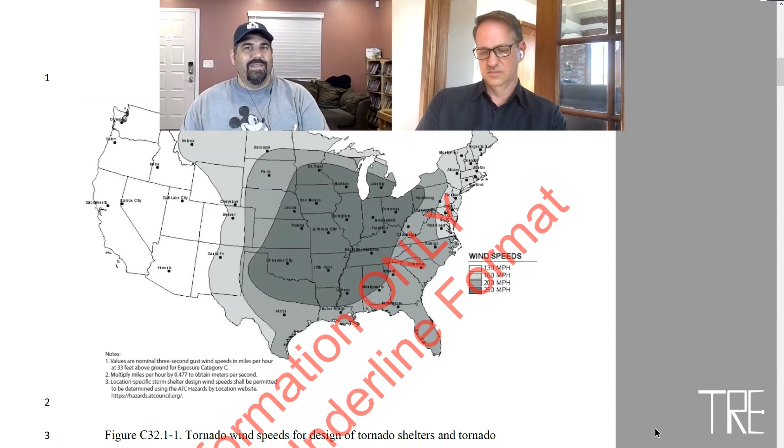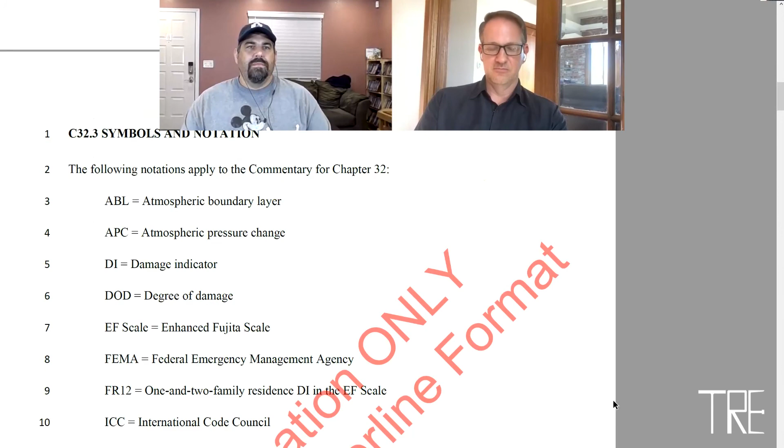And there's that FEMA and ICC 500 big 250 mile an hour bullseye, and almost everything else is in the 200 mile an hour range. Let me propose also that it's possible this is all being pushed by the insurance industry. I'm not sure. But again, that's not the right motivation. Yeah, it's not going to impact your homeowner's policy because you're not included in these provisions.

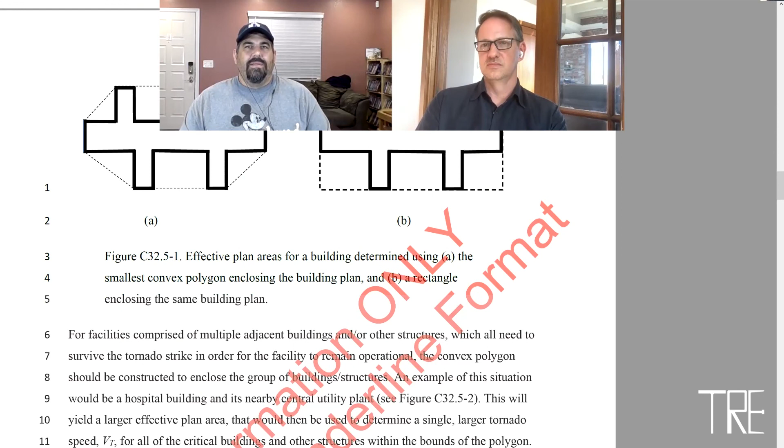So there's the graphic on how you're supposed to determine plan area. Is it A or B? I think both are acceptable, or maybe it's just telling you the different kinds because they have a fancy word for this one. Oh, the smallest rubber band property line.

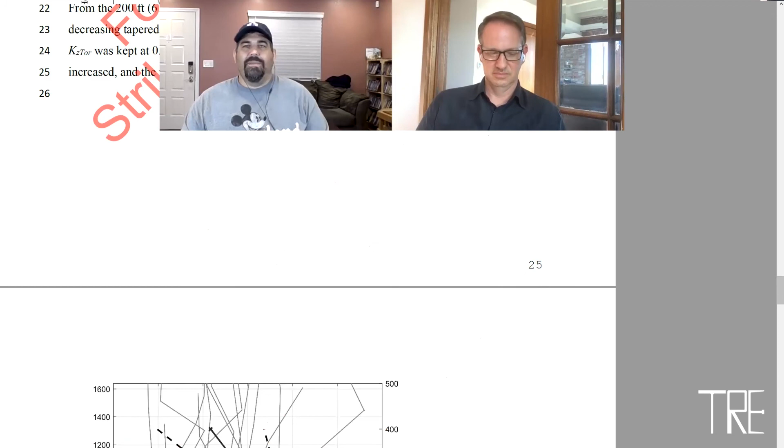Yeah, so it gives you some examples in here. Yeah, I feel it's lacking. I don't feel like we're doing very much good for the potential costs and time that this is going to sink into us. And I would have hoped that the rational discussion would have fought this harder. Not because I'm against hardening against tornadoes, I just want to do it the right way.

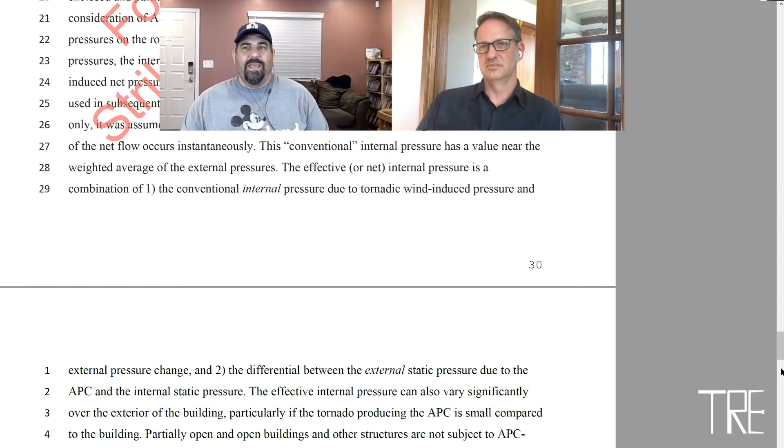And I'd much rather see general guidelines for how to build a safe room in your basement cheaply that doesn't require a lot of design. I think that if you could drop that cost and make it easier for people to reinforce their closets with something reasonable, right? Put the money into that testing and make it accessible to people that are going to be in their houses when tornadoes hit.

It was proposed to me, what if every mobile home community were required to put a basement level tornado structure in the center of the community? How many lives would that save annually without touching the building code? Yeah, so that's like an inverse tsunami platform. Right. And you really want to have an impact on people being safe in severe weather? Let's go after these lobbyists who work for manufactured homes that allow them to design to a different standard of care than every other permanent structure.

Right. It's not that tornadoes find mobile trailer parks. It's that they do the most damage to them, whether they're near or far away from them. Right. They just have to be adjacent to get tossed around by the tornado. And right. What if a smaller overall investment in mobile structures results in the same number of lives saved? I would assume it would increase the number. It'd be better bang for your buck on lives saved. Yeah.

I mean, I think this assures that you and I will never get invited to a code committee meeting.